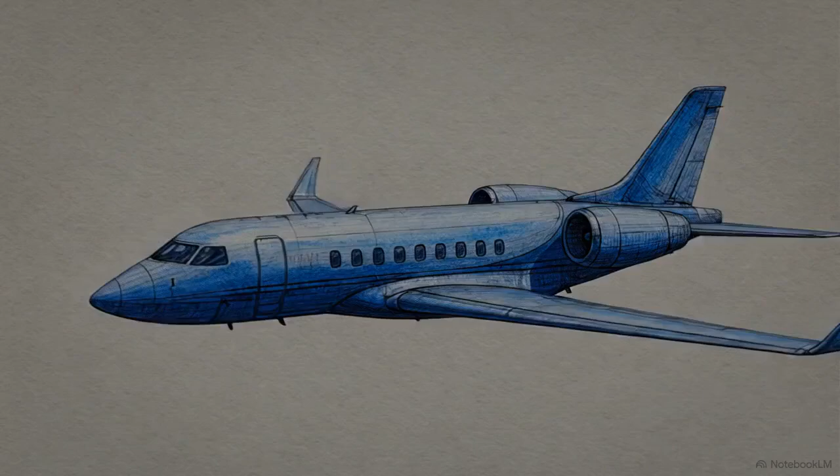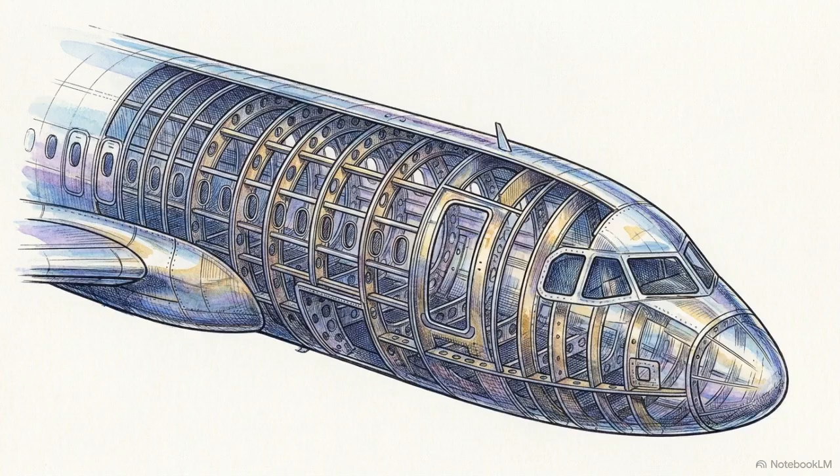Modern aerospace engineering involves navigating an enormous parameter space. To design a viable aircraft, engineers explore millions of specific combinations across wing shape, internal structural configuration, and material selection. Historically, finding the safest and most efficient combination of those variables required years of iterative drafting, testing, and refinement.

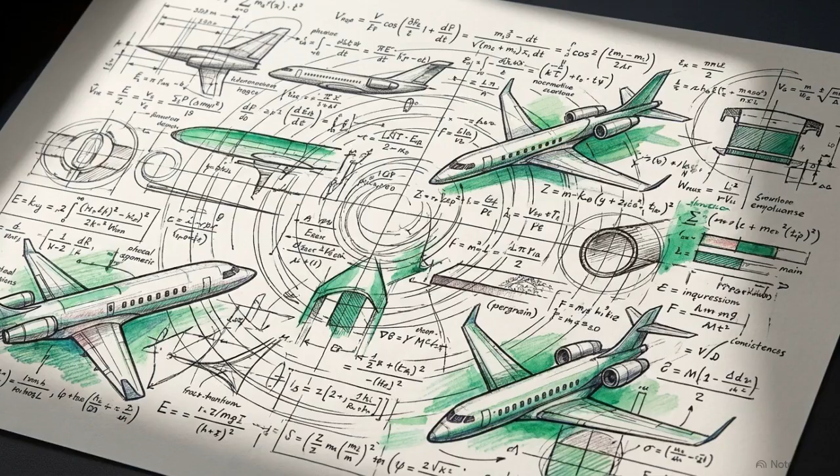The central bottleneck in this process is the time cost of physics. Traditional computational simulation and physical wind tunnel tests take significant amounts of time for every single design iteration. Because of that time cost, testing every possible combination of variables using conventional methods is mathematically impractical.

Artificial intelligence compresses this timeline by acting as a high-speed filtration layer that supplements traditional physics-based simulation. By rapidly screening out unviable configurations in a digital environment, the technology identifies failures before physical materials are ever cut. To traverse this parameter space faster than human drafting allows, engineers deploy machine learning models.

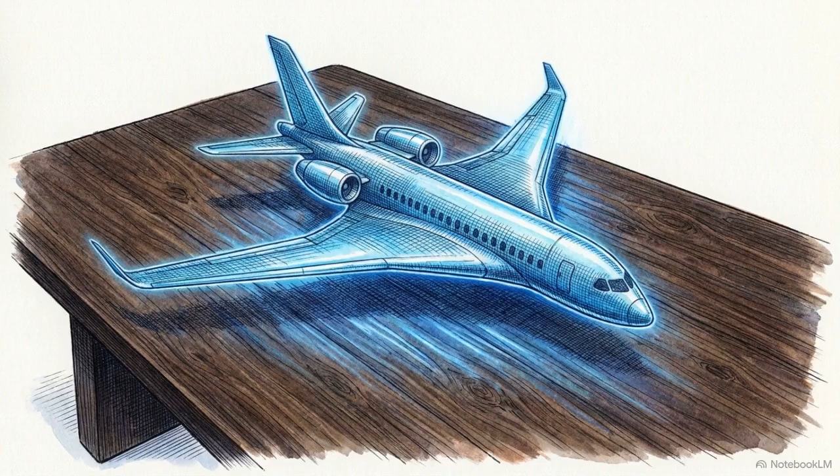In this new workflow, thousands of wireframe wing shapes enter a funnel, pass through a machine learning layer, and output a handful of viable candidates. This neural network evaluates designs in days, a process requiring years using traditional loops. Because the top of this funnel is now so wide, engineers can explore unconventional permutations they wouldn't normally have the time or budget to draft manually.

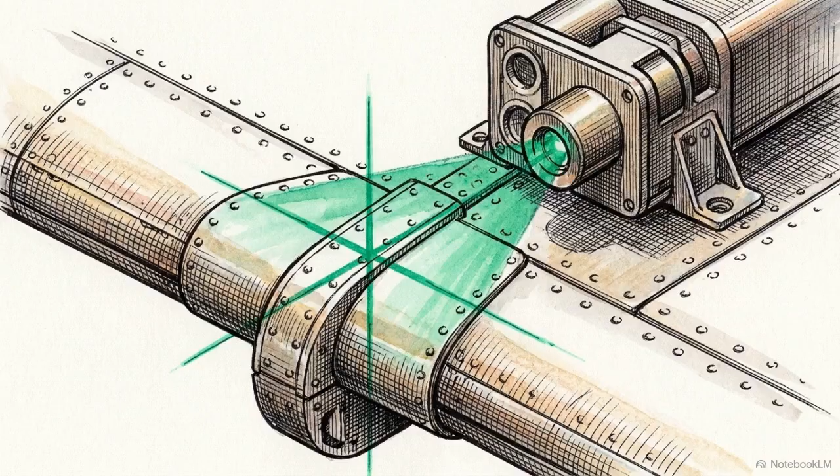Once the AI identifies the most promising candidates, only those specific shapes move forward to physical prototyping. This AI-augmented approach to virtual testing does not eliminate physical test campaigns. Instead, it makes them significantly more targeted. By focusing expensive physical tests strictly on these AI-vetted optimums, aerospace companies lower overall development costs and accelerate their time to market.

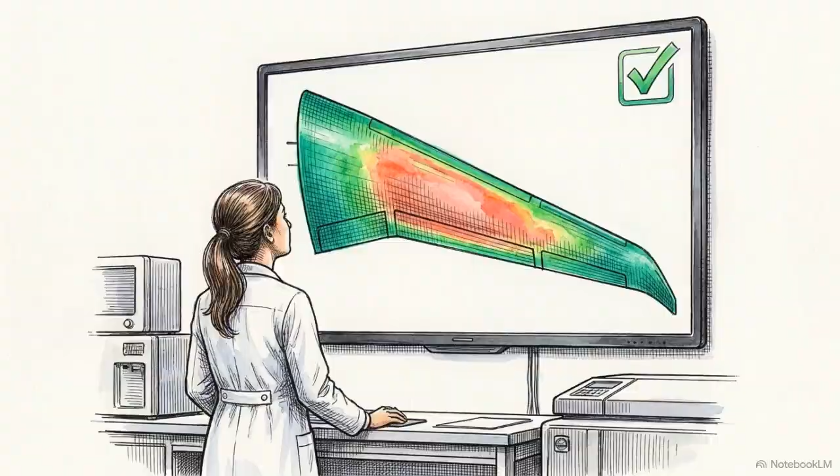Engineers rely on these models to filter out poor aerodynamic profiles early, committing to detailed physics simulations only for the most promising shapes. By bypassing the computational bottleneck of fluid dynamics, ML-accelerated models enable a broader search for the perfect aerodynamic shape.

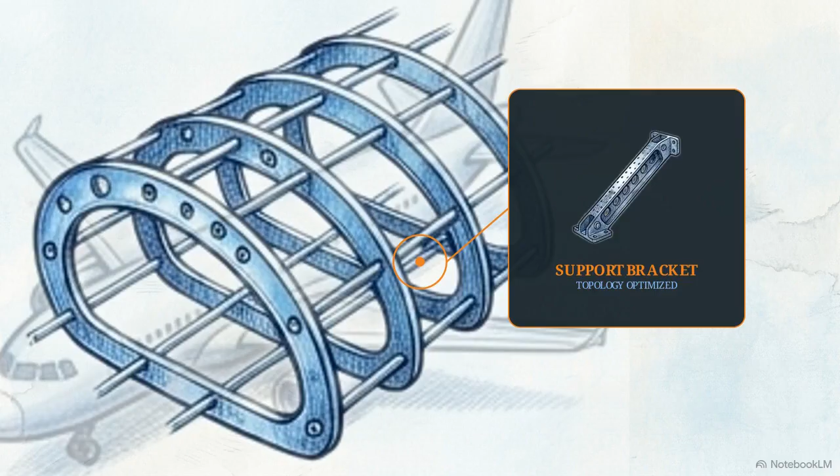Moving inward from the skin of the aircraft, this same optimization process is applied to the internal structural integrity of the fuselage and its support brackets. Here, we see generative design in action, as a heavy, solid metal bracket dissolves and reforms into an organic, skeletal structure. This applies the concept of topology optimization. Algorithms automatically carve away excess material to generate shapes that satisfy strictly specified strength and weight constraints.

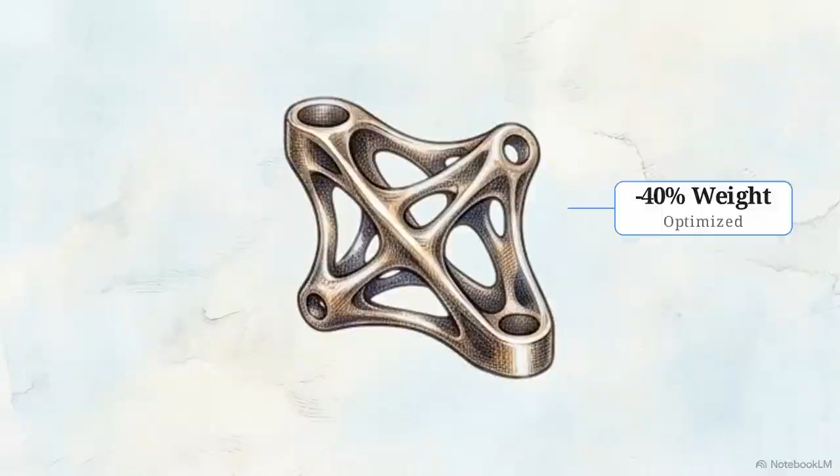In aerospace engineering, shedding every possible ounce is critical, as weight dictates total fuel burn over the lifespan of an aircraft. Just as machine learning accelerates aerodynamic screening, AI-powered structural analysis accelerates the standard finite element analysis process. The models evaluate exactly how these proposed, highly complex internal structures perform under the various mechanical loads they will experience in flight.

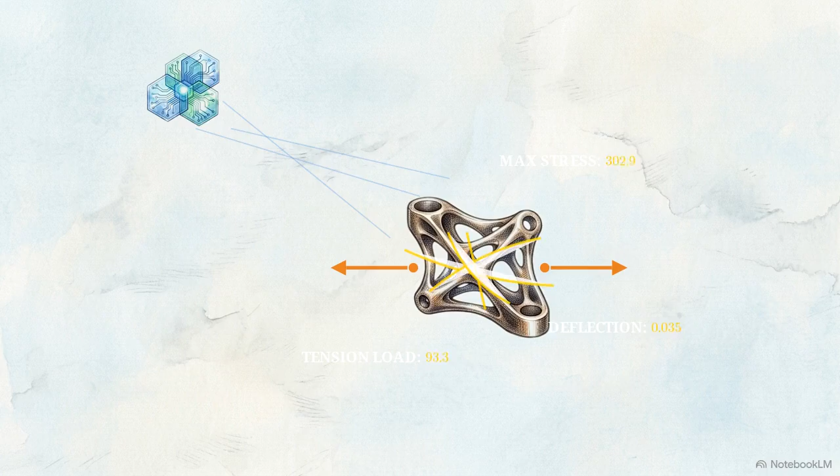However, a mathematically theoretical optimum is useless if it cannot be physically built in a factory. Modern AI tools incorporate manufacturability considerations into the optimization process. When a manufacturability constraint is applied to this diagram, the extreme internal curves snap into standard, machinable geometries that can be efficiently produced.

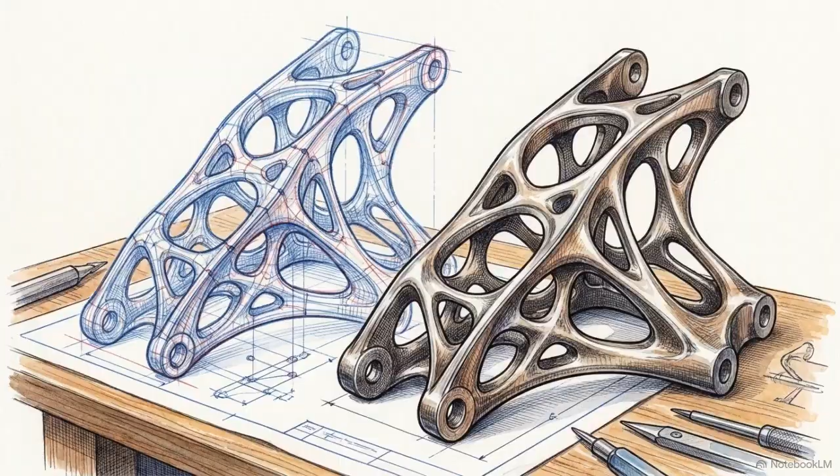Once produced, computer vision systems on the manufacturing floor detect defects in these complex assemblies faster than manual human inspection. Structural AI reduces aircraft weight while ensuring the resulting designs bridge the gap between mathematical theory and buildable reality. The application of this technology continues long after the engineering design phase concludes.

Once deployed into commercial flight, AI transforms daily aircraft operations. Machine learning models analyze weather patterns and air traffic to optimize flight paths across an airline's entire route network. Adjusting these routes in real time yields reductions in both fuel consumption and total emissions.

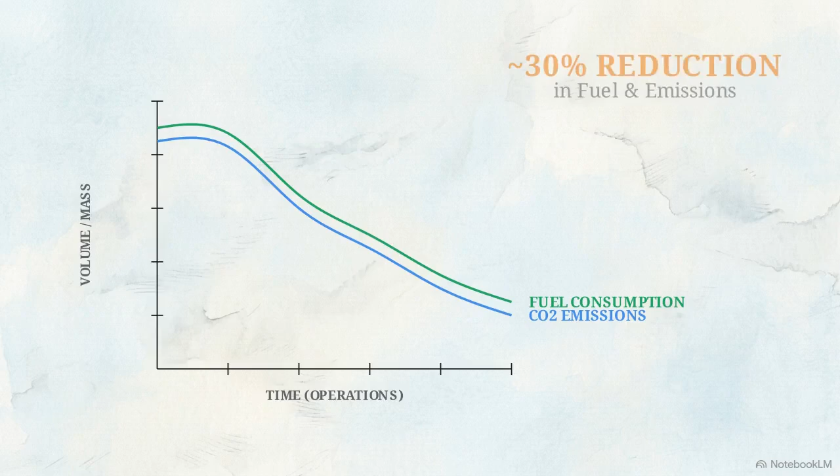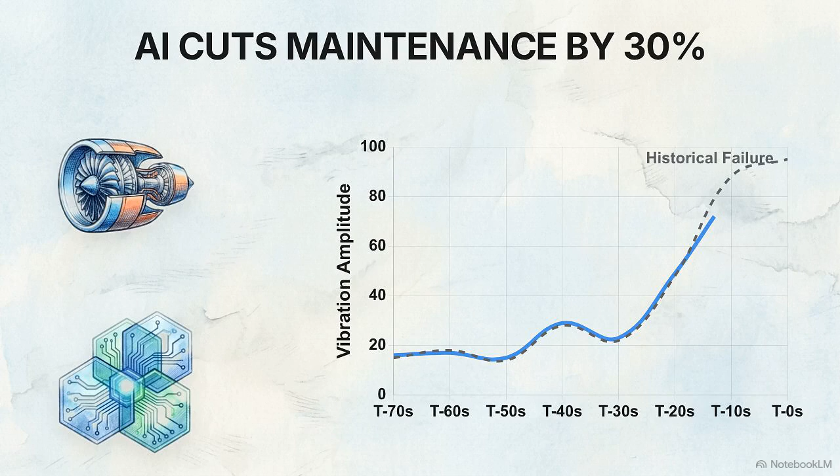Returning focus directly to the hardware, AI models connected to the aircraft's engines execute predictive maintenance. Looking at this engine's data output, the machine learning model analyzes sensor readings. When the data stream hits a specific historical pattern, the system anticipates a component failure and triggers an alert before the line reaches a catastrophic peak.

By anticipating failures before they cause delays, industry estimates suggest AI-driven predictive maintenance can reduce unscheduled maintenance events by roughly 30%. Through operational AI, the modern aircraft operates as a continuously learning system, improving airline reliability.

Every one of these predictive and generative capabilities relies on a single underlying foundation: data. Training an effective AI model requires substantial volumes of consistent, well-documented historical design and test data. Because of this dependency, aerospace companies view their proprietary test data as a strategic competitive asset, essential for training more capable internal design tools.

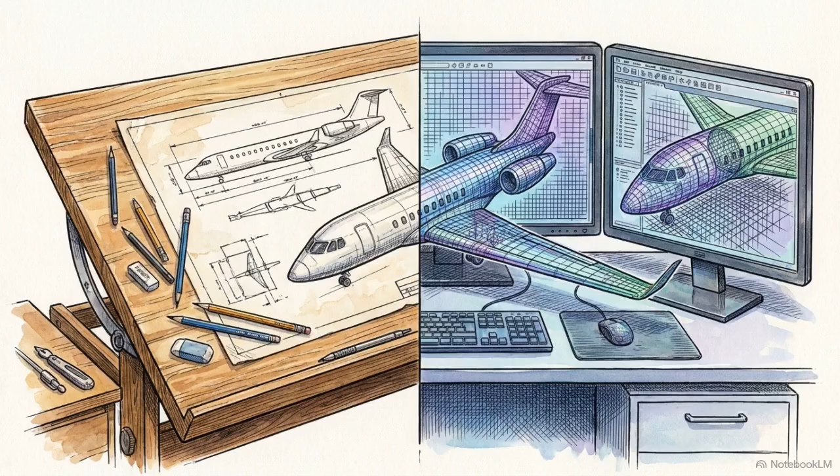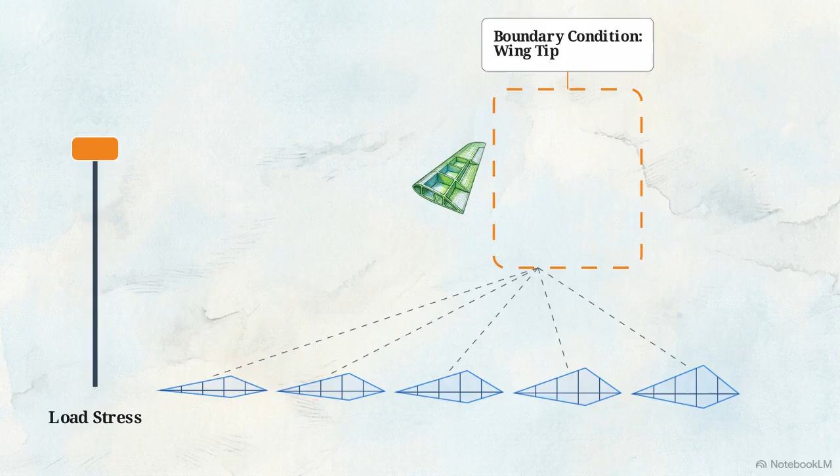This reliance on data and algorithms has shifted the daily labor of aerospace engineering. Humans no longer manually generate every candidate design from scratch. Instead, the engineer's role now focuses on curating boundary conditions and validating the multitude of options generated by the AI. Human engineering judgment remains necessary to verify that these AI-generated designs account for safety certification requirements and long-term physical durability.

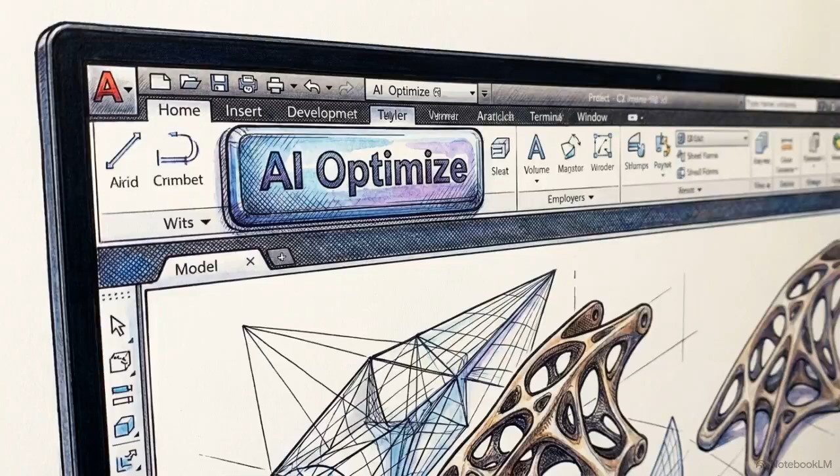Artificial intelligence elevates the aerospace engineer from a manual draftsman to a high-level decision-maker who manages algorithms. Digital design tools integrate these AI capabilities into standard aerospace software, making advanced optimization accessible to a broader range of engineers. By screening massive parameter spaces and anticipating operational failures, AI-driven simulation compresses development timelines, while yielding more optimized designs than traditional methods alone.

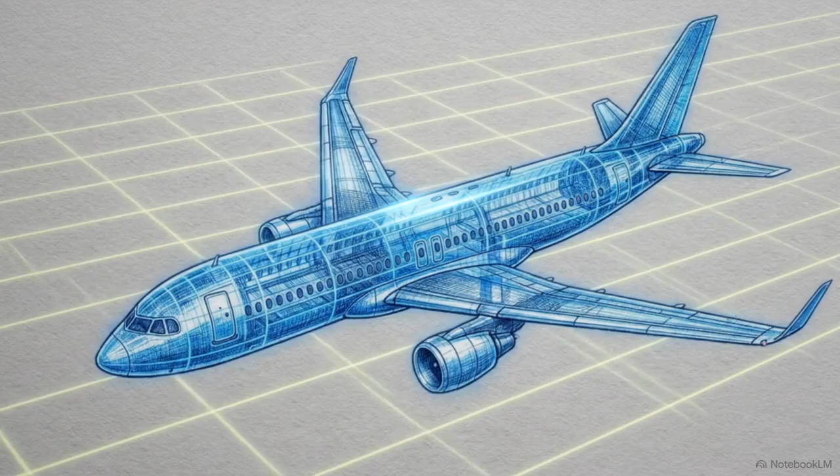As this aircraft transitions from a physical object into a continuous digital model, we see the complete convergence of this data pipeline. In our next episode, we will explore how this continuous flow of data creates the digital twin and the digital thread.